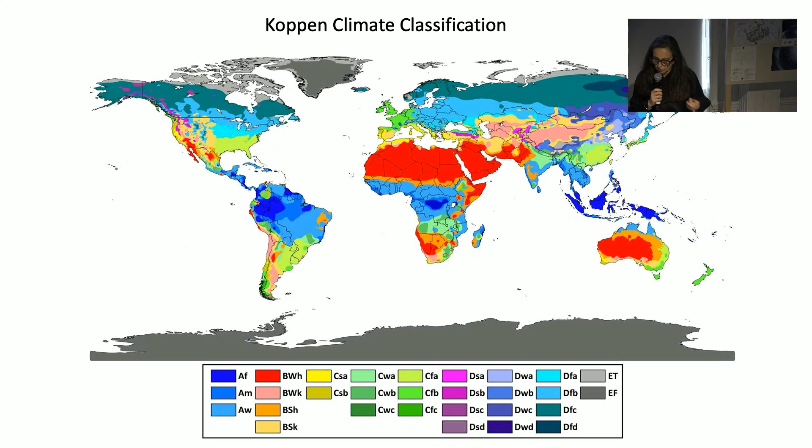How hot does it get? The solar angles change. How much rain do we get? It does vary even within the tropics. So this variety is very important to be contemplated in design if we are to stop making gestures and start doing effective design proposals. This is just to emphasize what the topic is about.

In this lecture, I will approach the design challenges of this region, which stays between the Tropic of Capricorn and the Tropic of Cancer. It does vary from a very warm and humid zone, where we see the darkest blue, to a variation of warm climate with some quite dry seasons as well.

So some facts. Why the tropics? It is home to some of the world's most undeveloped regions and those most affected by climate change. All these facts just add up to the fact that we should all be paying attention to the tropics if we want to make a difference in the world when it comes to climate change.

When it comes to climate, even before climate change, the tropics account for 40% of the world's total surface area and are home to approximately 80% of the world's biodiversity. In addition, we know that it is the concentration of poverty and vulnerable communities.

Vernacular architecture design in the tropics by tropical people offers beautiful, incredible lessons that we always look back on when we want to design something in response to these conditions. They know very wisely how to create not just comfortable - I would like to put this word in question - but healthy and pleasant conditions, and also create opportunities for social and cultural activities.

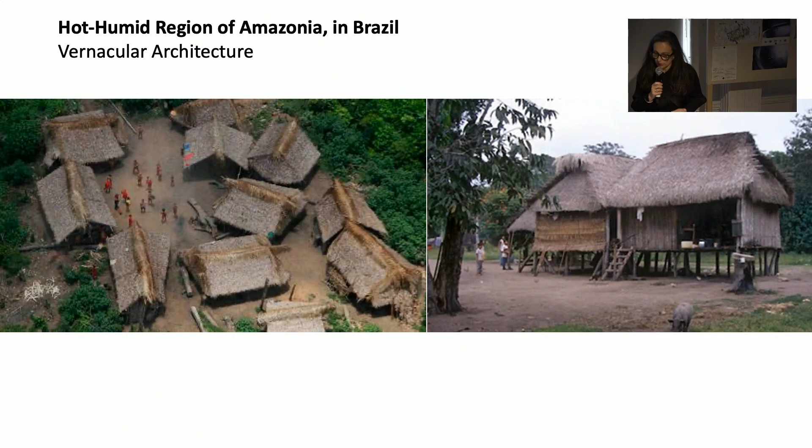So it's a reasonably new problem for architecture. That's before modernism did all these beautiful and, I would say to a big extent, responsive buildings that we will see. But how does it feel? What is Rio like when it comes to climate?

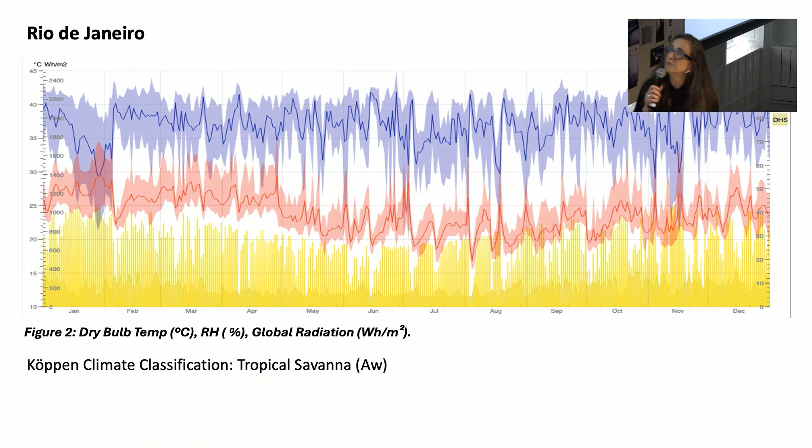It's something where humidity is almost constantly above 80%. Temperatures in the summer are easily above 27, between 27 and 35 degrees. The maximum can easily peak over 40.

Global radiation of more than 800 watts per square meter on the horizontal surface. That's quite a lot of energy. But it's a place that when we are in the shade and exposed to wind, you can really enjoy the tropical condition.

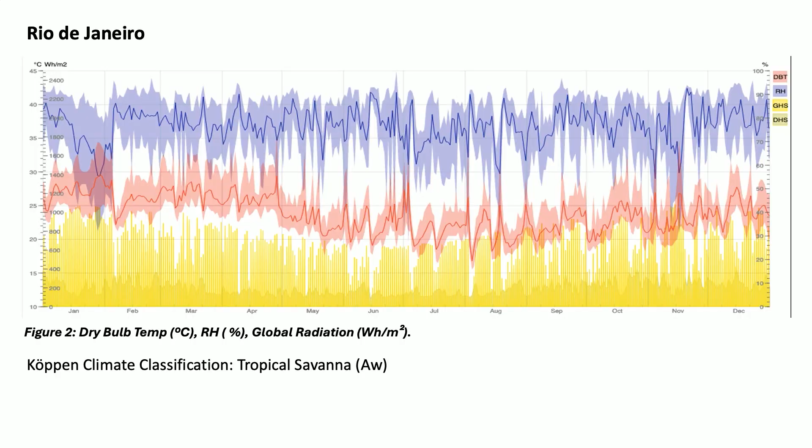And this is a problem, 1 million people living in a slum. So almost the glamour of the vernacular architecture, the glorious space of vernacular architecture, how do we apply the lessons when we have this context to deal with? This slum, by the way, was founded over 100 years ago, and it's a different issue than in Latin America, where the phenomena is more recent.

Now, just a bit of context. The United Nations put this challenge to us. By 2030, they want an agenda - they have an agenda for sustainable development. And it's very clear that we're not going to meet it if we don't look at the reality of the tropics today and what is going on there.

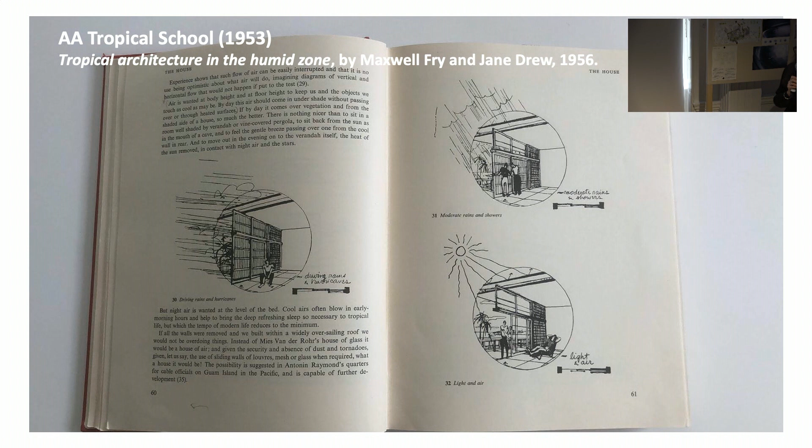But the discussion about environmental design in the tropics is not new, and the problem of the slums is reasonably new in some parts of the world. But we've been thinking about that, and this very school, the AA, was the center of the world in discussing environmental design for the tropics in the 1950s, in the tropical school.

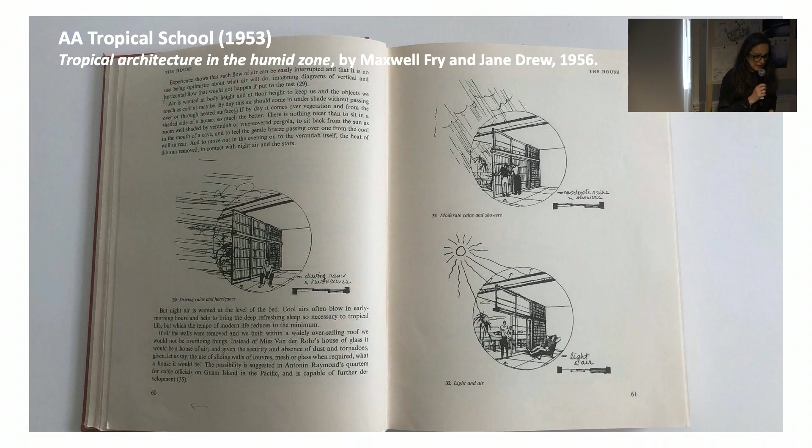Last year we had an exhibition here about the work of the Department of Tropical Studies that started in the 50s with two architects, British architects, Drew and Fry, Maxwell Fry and Jane Drew, who worked in India, worked in Africa, well, in Africa first, and then came to the AA to found the tropical school.

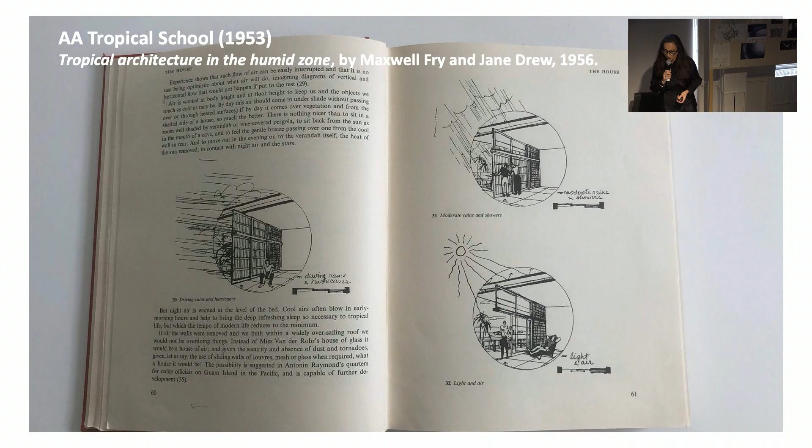And they had a very local approach to the topic. They look at how people use buildings, how communities got together, and they try hard to understand the climate. There was a lot of physics and technical knowledge applied, beautifully summarized in sketches and buildings in the end that contemplated the sun, the humidity, the air movement, a lot about transitional spaces.

There's one critique I have to that architecture, which is the sheer amount of concrete that the tropical modernism took to Africa and to India. But it was part of a whole moment that architecture and progress was going through.

In the lessons that we can take from their work, we see very lightweight envelopes, despite the concrete structure. Very well thought through and detailed apertures and systems for ventilation and shading, all integrated in the building systems.

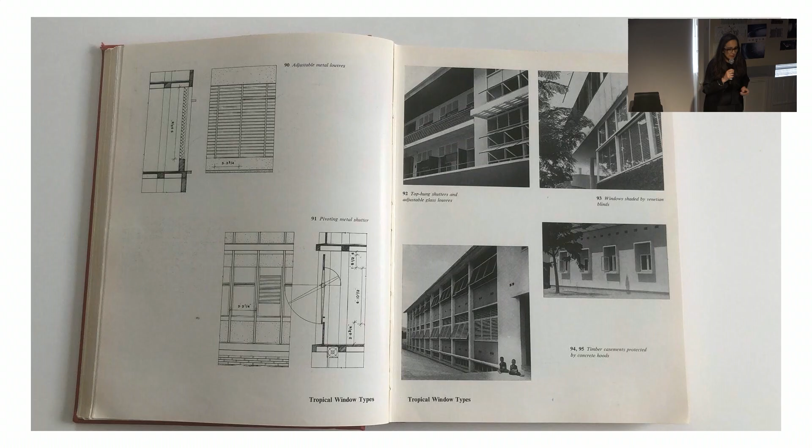These are some of the books that we have here in the library. I had a lot of fun, spent quite a lot of time going through them, and it's really beautiful. This knowledge was translated in a series of buildings - community buildings, residential, schools - including the Aburi Girls School, one of the first projects from Drew and Fry in Africa, in Ghana.

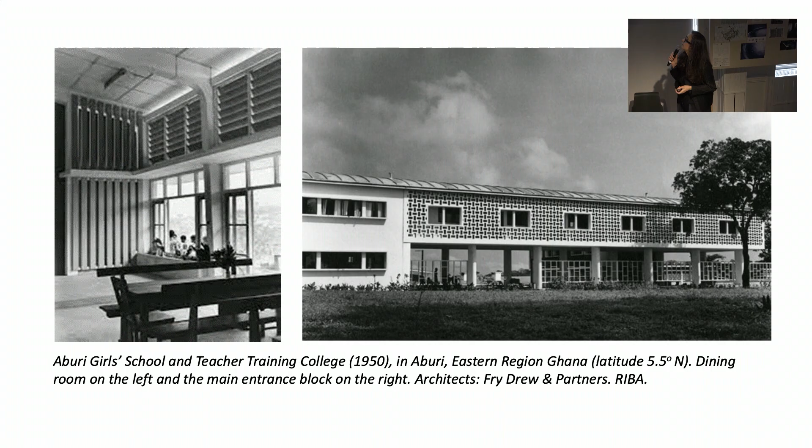Now, that synthesis that they did in architecture was backed up - and that's maybe my first strong point here, or message I would like to convey - very strongly backed up by physics, technical knowledge. Building physics is important, and we need to understand the phenomena. We don't always need to get to the details of the calculation, but we need to understand what is going on between the environmental forces, the building systems, the spatial compositions, the proportions, and the climate.

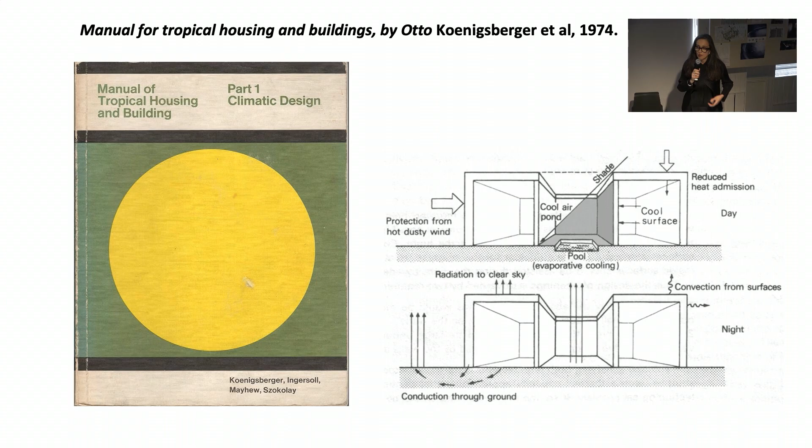And that was the work of Koenigsberger, the second director of the Tropical School, who stayed for two decades leading the school here in the AA, and formed a generation of architects from Europe, from Africa, from India, that came, studied, and went back to practice.

One of the seminal pieces by Koenigsberger was the roof in the warm, humid tropics, where him with a group of researchers studied more than 40 alternatives, looking at the possibility of materials, but also very detailed physics. And I love this - I photographed this page from the book where he says, if we want to standardize architecture in the tropics, the cities will come and they will grow, and there will be a population explosion, and we will need to produce a lot.

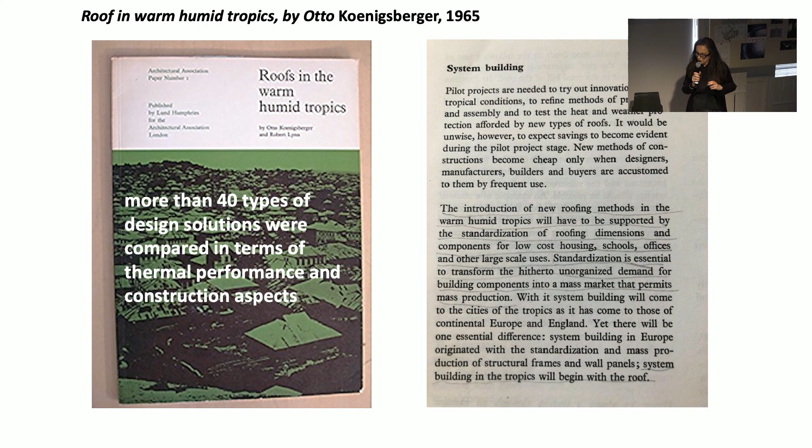Although in Europe we started our standardization process by looking at structures and wall components, when it comes to the tropics, it's the roof that's going to define this architecture. And of course, that comes from a well understanding of the climate. But not just the roof, which roof? We're going to talk about this in a few minutes.

Here is my second critique about the work of that generation. All this discussion about environmental design, back then and now, is based on a notion of comfort, of reasonable conditions we're supposed to create in buildings. Although there was a look to the culture and how people used buildings in those contexts to design for them, there was also a very westernized construct of what comfort is. And we're still doing that today.

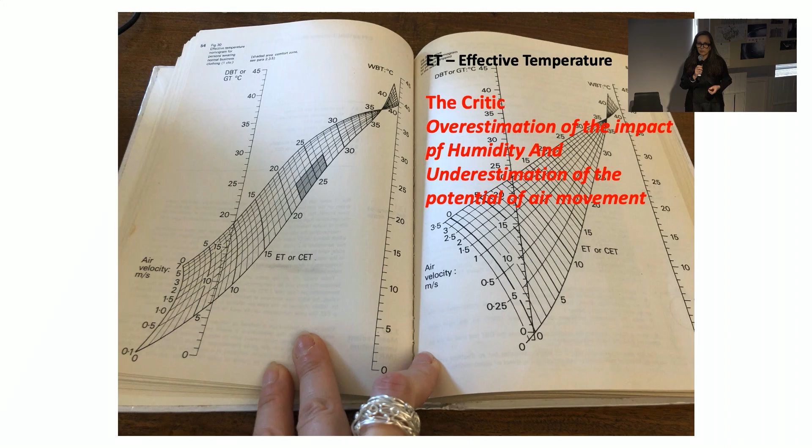This is one of the biggest barriers to advancing good environmental design in warm regions of the world. In this small gray area in the graph on the left, we see a combination of air temperatures and air movement defining what's supposed to be a comfort zone, far too narrow. 27 degrees is not too hot for people who grow up in the tropics, and 70% humidity is definitely not a problem. So there was an underestimation of the role of air movement in creating pleasant and healthy conditions, and an overestimation of the impact of humidity. I'll repeat, we still do this today, but less.

Decades later, we have what we call the adaptive comfort model. Those who study environmental design more are aware of that. It establishes a relationship between outside and inside temperatures. So depending on the average of the last week, a range will be acceptable inside buildings in a specific place.

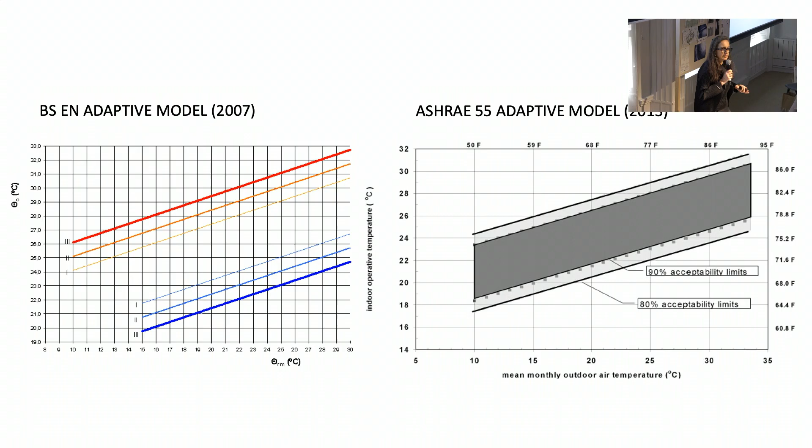Now if we take an average of the last month, this range will be slightly narrower. If I take an average of the last 3 months, it will be slightly narrower. The point is, we adapt. So the body has a memory of what's happening climate-wise — of the last week, the last month, and the last 3 months. So comfort, or health — when I say I'm uncomfortable in a certain condition, or assume other people will be, and therefore I need to design systems, we are normally not considering the potential that adaptability gives.

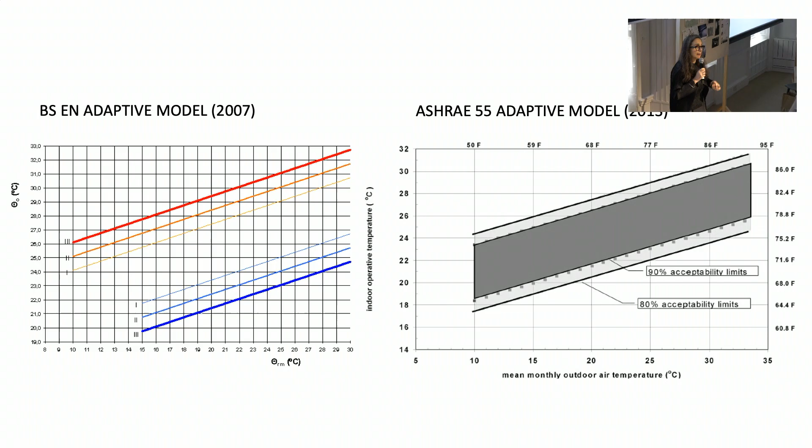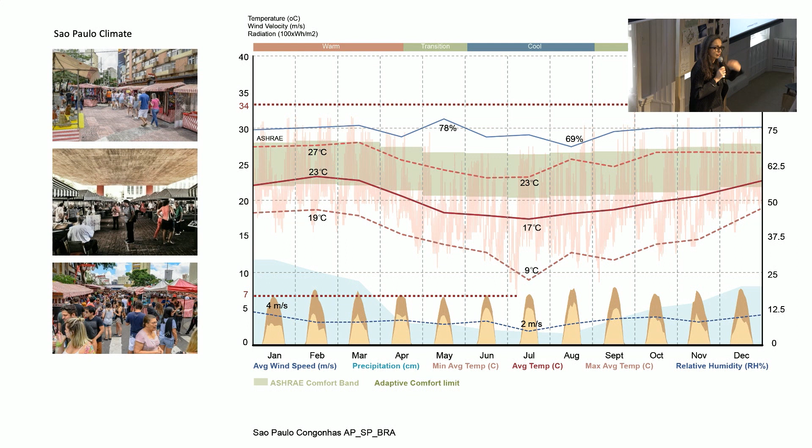If we don't consider that range, if we want to reduce the entropy in buildings, there's no way we can do it with architecture unless we condition spaces. But we definitely don't need to — not for health reasons, and not for comfort reasons.

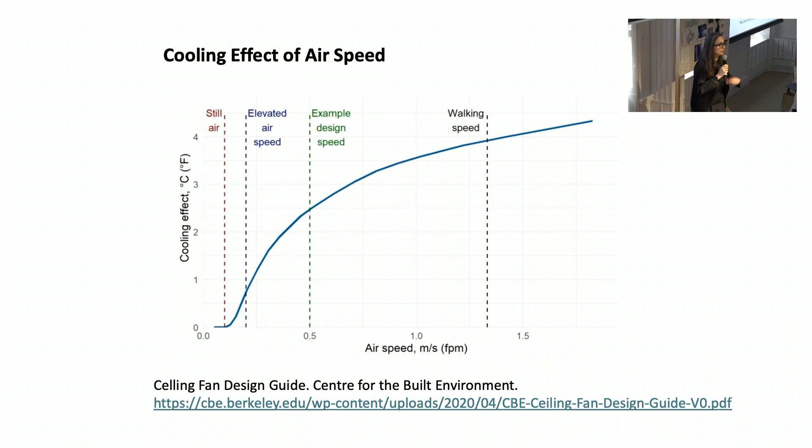If we consider now the effect of air movement, which has been studied a lot in the last 20 years, especially in warm, humid climates, we can have an increase or decrease in perception of almost 4 degrees — definitely 3 degrees with 1.5 meters per second, which is acceptable indoors. Papers will fly, but who works with papers? And if we have papers, we can find ways of fixing them. It doesn't need to be 1.5, it can be 1 or 0.8. The fact is we need to play with those variables.

Now, this is so important — I'm sorry I have this written. I thought a lot about how I could show these two concepts in images, but I didn't figure it out last night when I was preparing this. So I'm going to tell you instead.

There is a lot of discussion — one of the last points on comfort before we start talking about design — a very recent discussion that one of the reasons we are so vulnerable to viruses and other sources of disease, and why our immune system is so weak, is because we live in very narrow thermal conditions in conditioned buildings. It's killing our immunity. The more we are exposed to colder and warmer conditions, the healthier the body will be, more resilient to temperature variations, and the better our health will be.

In addition, which is fantastic, researchers on thermal comfort tell us that the best of thermal sensations — called alliesthesia, a change in sensorial perception of thermal conditions — happens in transitional spaces, with variations between air temperature, surface temperature, air movement, and even exposure to solar radiation. So these are the same people who told us decades ago that comfort was narrow, then improved it to the adaptive thermal model, and now are telling us that even the adaptive comfort model can be questioned, should be questioned.

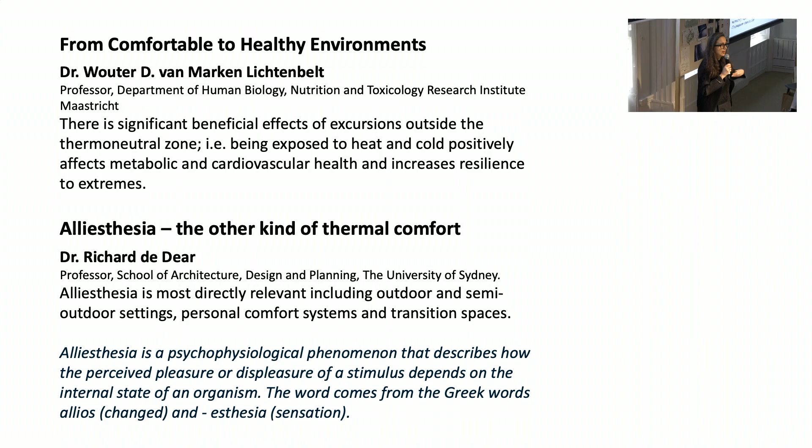When I was in the lecture and these guys were presenting these concepts, I raised my hand and asked, are you saying we can think of a building that doesn't have static or fixed conditions, but actually transitions? And they said exactly that. As we do that, instead of closing ourselves off as climate becomes more challenging, we're going to open up—open to the challenges of climate change, open to hot temperatures by creating transitions and exploring these sensorial experiences we can create.

The discussion about thermal delight and environmental diversity in architecture is not new. We have the work of great figures like Lisa Heschong in 1979, and Koen Steemers from Cambridge, talking about diversity and delight. This is where we unlock things once we understand this potential.

Now let's talk a bit about design processes. Learning from the existing built environment shows us examples of how that sensory experience, that alliesthesia, that healthy condition can be found. There's also the importance of building physics—the principles of environmental design—and the value of analytical studies that reduce uncertainties in the environmental conditions we're designing for.

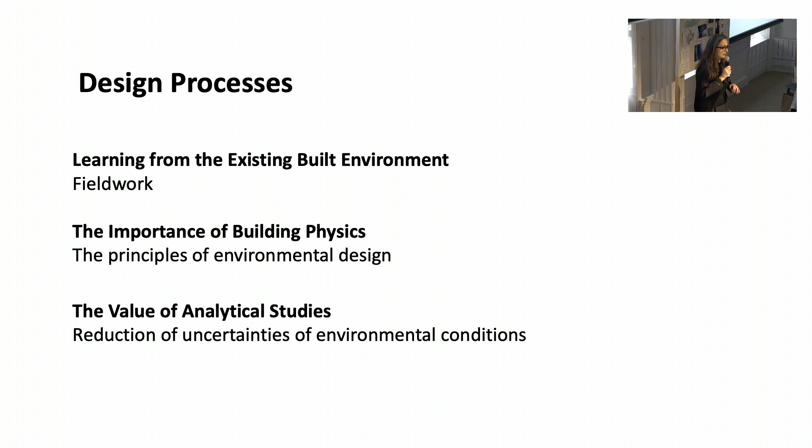So here are a couple of examples of design research I supervise in the graduate school here at the AA. One just finished, for a labor camp in the capital of Kerala, India.

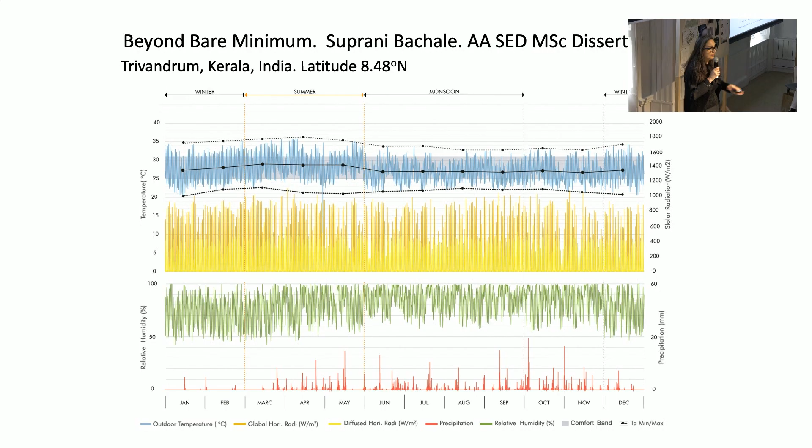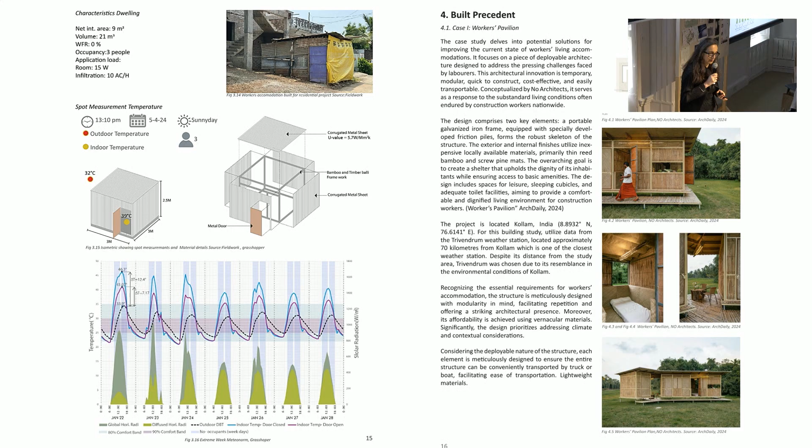We started by looking at the climate—environmental design starts by analyzing the climate very carefully. Then we looked at existing conditions, the materials available for this kind of building, and alternative solutions using better examples with natural materials.

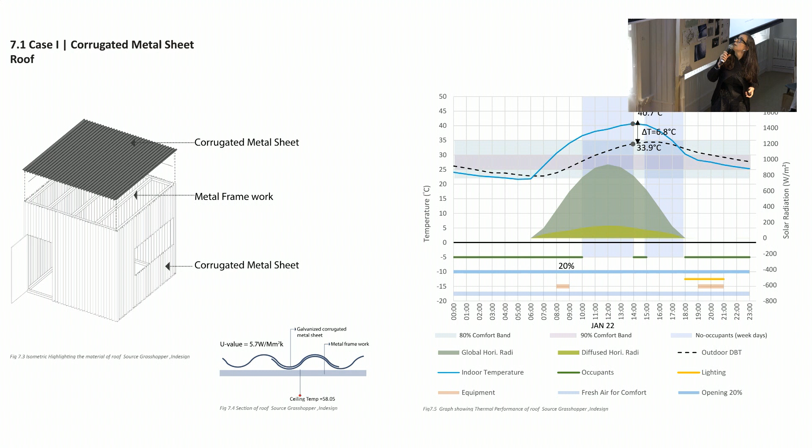Then we did what Königsberger told us to do: let's look at the roof. We're at a very low latitude, and a metal roof can give an internal temperature of 40 degrees—far over heat stress. If we're talking about health, anything above 35 degrees becomes heat stress, a serious health issue, whereas the outside temperature is only 33 or 34.

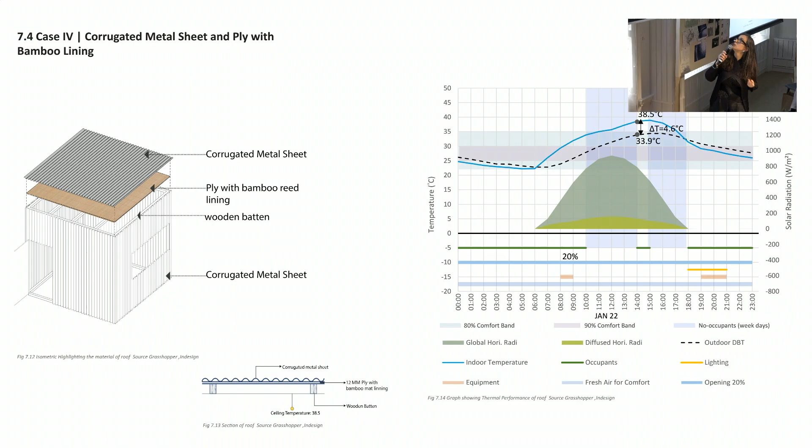As we increase thermal mass—not just shade—even in the tropics, when temperatures are above any health limit, say 34 or 35, mass becomes an important and useful strategy. We can bring the temperature down, and if we increase mass and insulation using the metal roof that's already there, we can bring it even lower.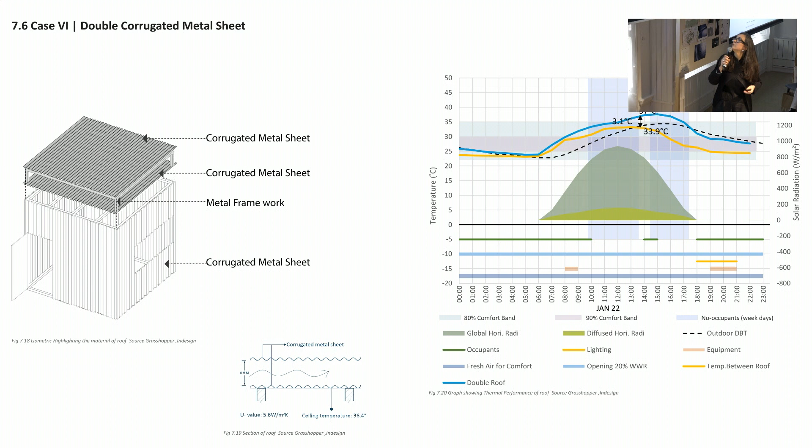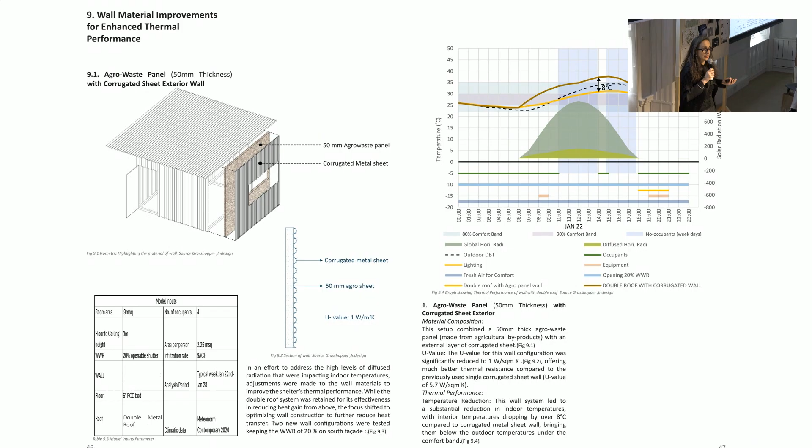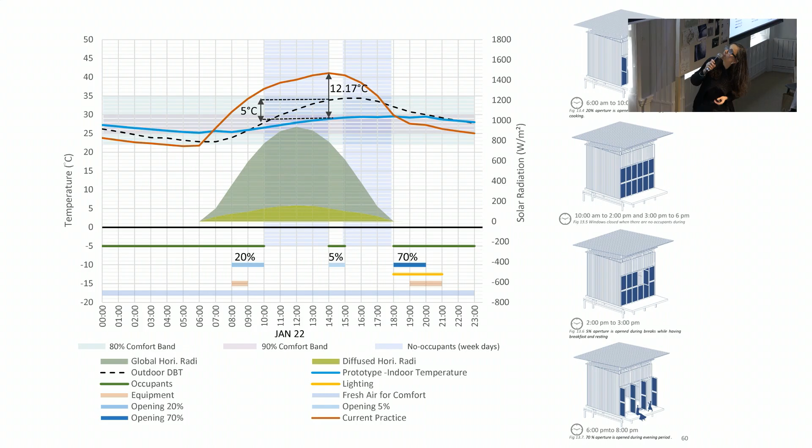Playing with reflections, shade, and mass, we can get well inside the comfort zone, also working with the walls so the envelope has more resistance to high temperatures, while the openings allow air movement when temperatures are mild. This series of analytical work led to a great result: temperatures below 30 degrees when outside it's almost 40.

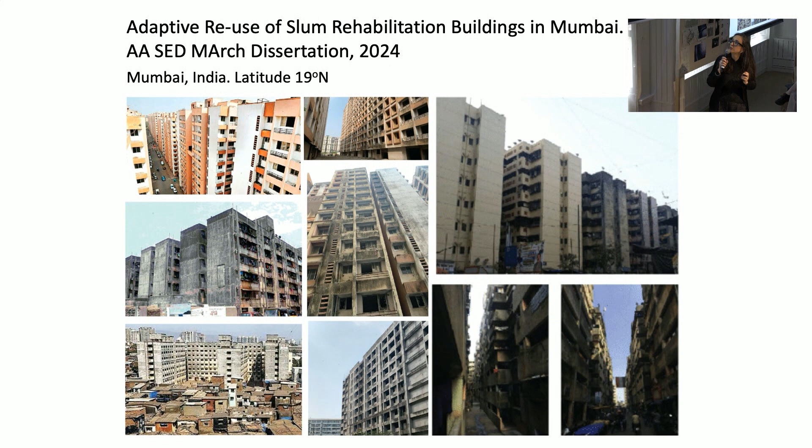Another exercise we did in the graduate school two years ago looked at density instead. The solution the Indian government gives in Mumbai for social housing is appalling, to say the least—the images speak for themselves.

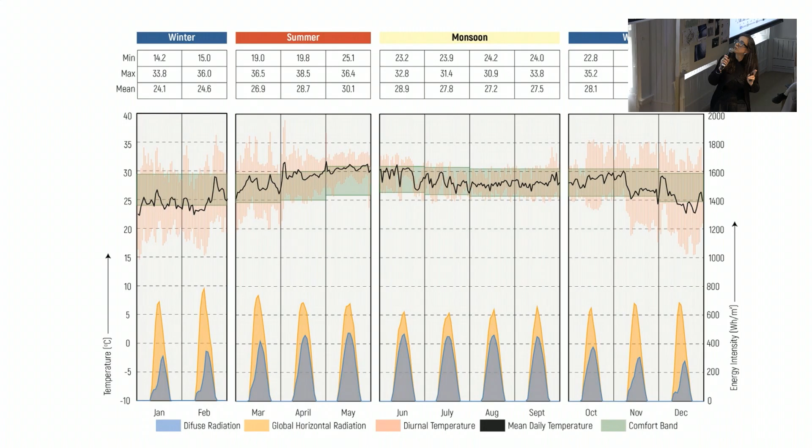When we look at the climate, it's actually not very challenging—easier than Kerala, easier than Rio. But we need to design well: we need to keep the sun out while bringing daylight in. We see average maximum temperatures just over 30 degrees, and in the worst case 34, where I can still keep the air moving and provide healthy conditions.

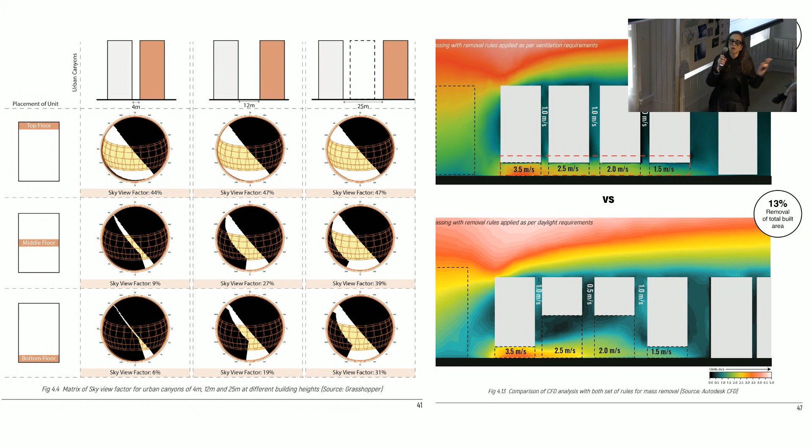So we took one of those social housing blocks that was designed but never finalized or occupied, and started cutting it—asking what's the minimum we need to open up that shape to bring daylight into the lower floors and air movement through the open spaces, creating pressure on the windows that leads to good internal natural ventilation.

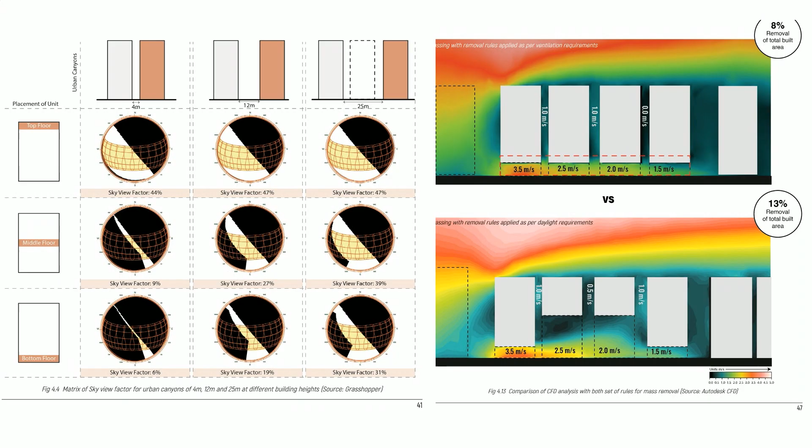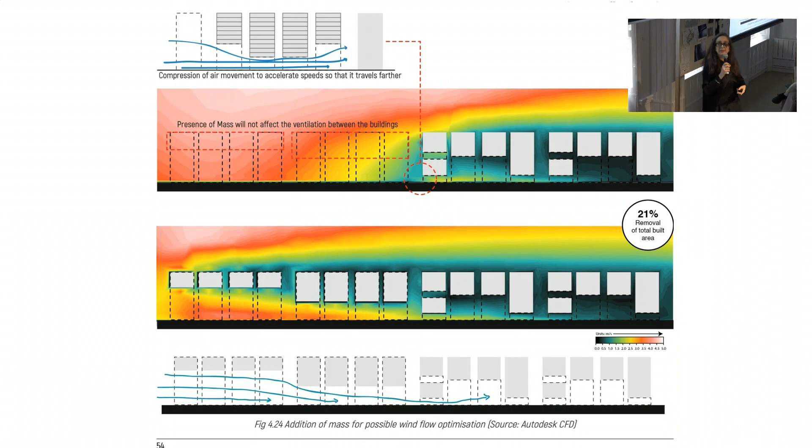We need analytical work, not just a feeling. We need complex analytical work. We can have simple analytical work helping us study the envelope, but we need complex analytical work to start looking at air moving between buildings.

After doing this minimum cut, because we want density, but there is a price. Some of this density will have to go for us to create living conditions in those spaces which already have a lot of carbon in their structure and envelope.

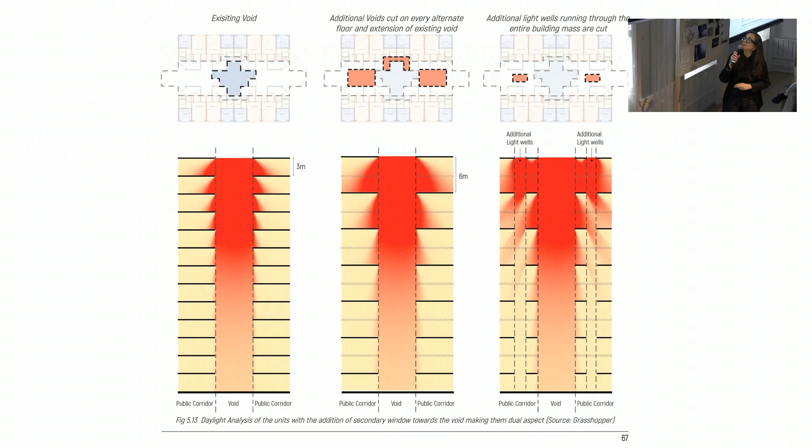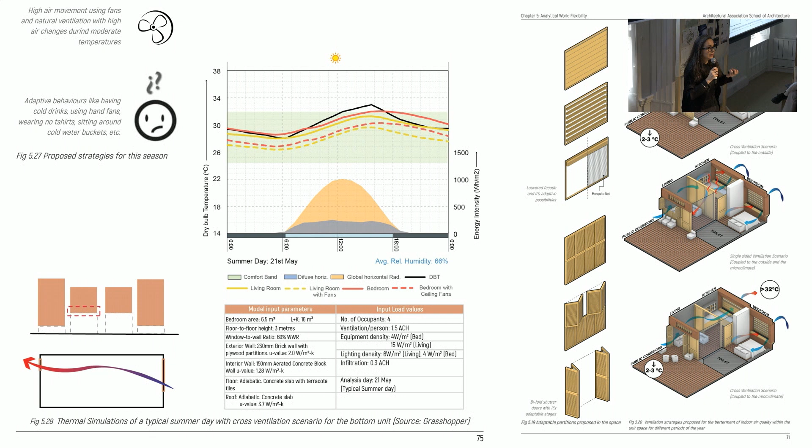Then we look inside the buildings. How can we improve daylight conditions? By creating this connection with the outside, we managed to get something below 30 degrees at peak when outside is almost 34. A series of transitions created shaded spaces where the mean air temperature would be far less than outside, just because, although it's an open space, it's shaded and has some mass.

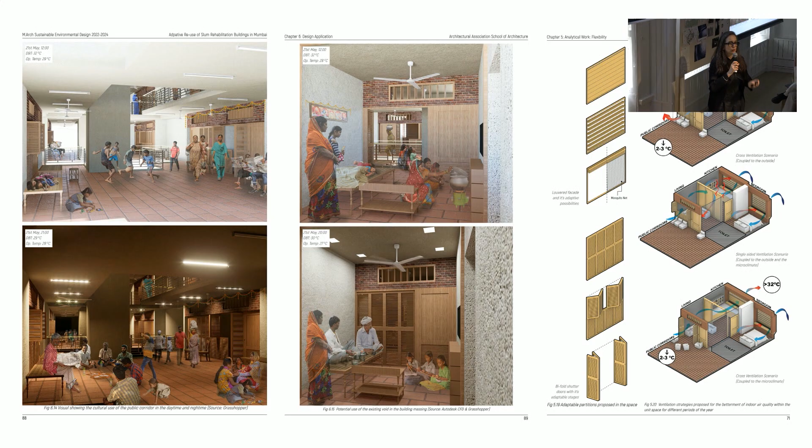That's the visualization, that's what we are imagining, like Weinstock asked us to imagine on Monday. So we work with the numbers, we work with the climate, we work with the principles. We build on the potential of adaptation, adaptability of the occupant, and we imagine better spaces.

Now let's go into the slum. A real-life project, something that started from a motivation that comes from these numbers. Brazil, sadly, is one of the countries in the world with the biggest socioeconomic inequality. As a result, or as a symptom of that, 30% of the population in São Paulo lives in slums, 22% of the population in Rio lives in slums, and the prediction is that we now have over 25% of the country's population living in slums.

Not different from what we saw in Mumbai, climate a bit more mild. We are in São Paulo now, Paraisópolis. It's wonderful, it means the paradise city, which is wonderful for these people. It's the hope to be inserted in the urban environment, to be near jobs, near healthcare and education one day. And that's why they come.

São Paulo, Rio, Recife, the big cities in Brazil receive a lot of the country's population looking to escape misery and be inserted somehow in a kind of urban infrastructure. So Paraisópolis has around 40,000 people living there nowadays, and is an example of a typical slum in Brazil or Latin America, consolidated, made out of brick, often with very vulnerable, very lightweight metal roofs.

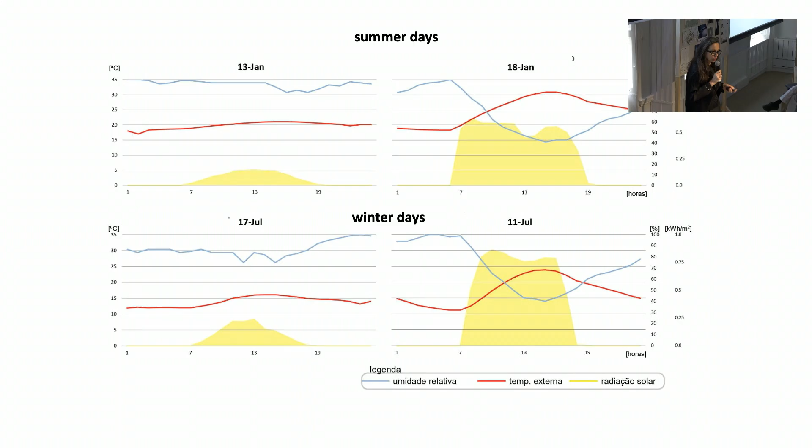When we look at the climate, it's not really challenging. Temperatures just go above 30 degrees on a hot summer day. Winter is very mild, it's perfect actually, 27 degrees if sunny. If it's an overcast day in summer, temperatures stay around 20-something. You just open your window - you just want the inside to be like the outside. That's a very important idea.

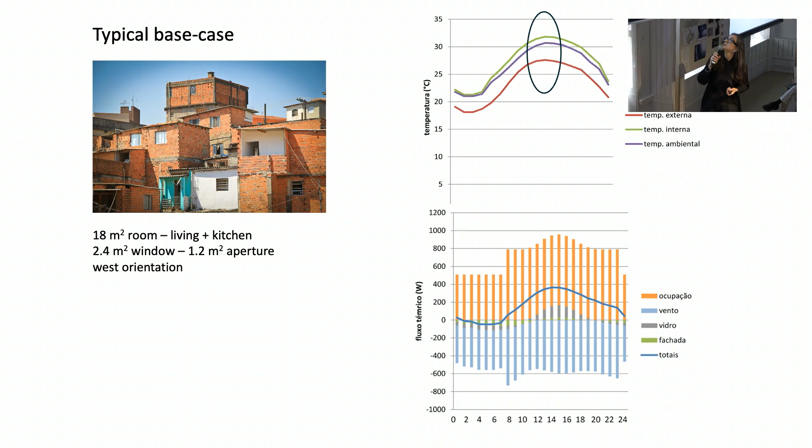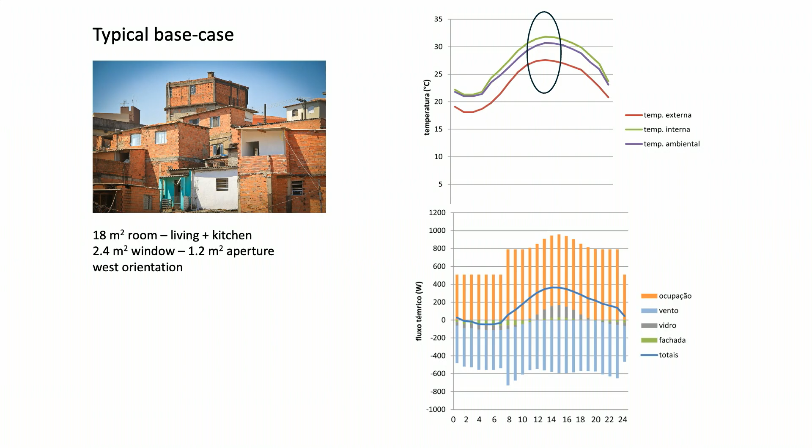So we did some very simple calculations to understand the impact of internal occupation, of internal gains, activities in the building. These people live in density and compactness. In fact, we saw if outside is 27, inside we can get over 30 degrees easily, 32, 33. What is the mistake here?

Ventilation is not working. The moment we increase the aperture to the point that we have half of the wall - now we are looking at a room which is not at the roof, otherwise the roof will be the main dominant factor here. But if we just want to study the effect of ventilation and windows in a community like that, and if we imagine the whole front wall can be permeable, like this image on the bottom right, we can have a reduction of almost 3 degrees Celsius. So ventilation works.

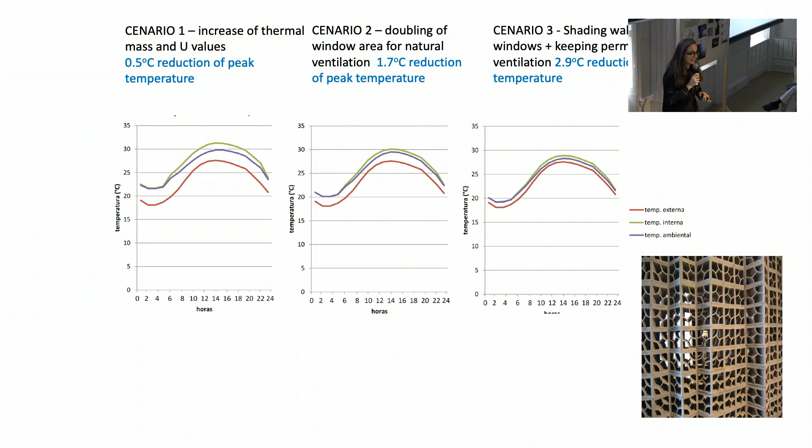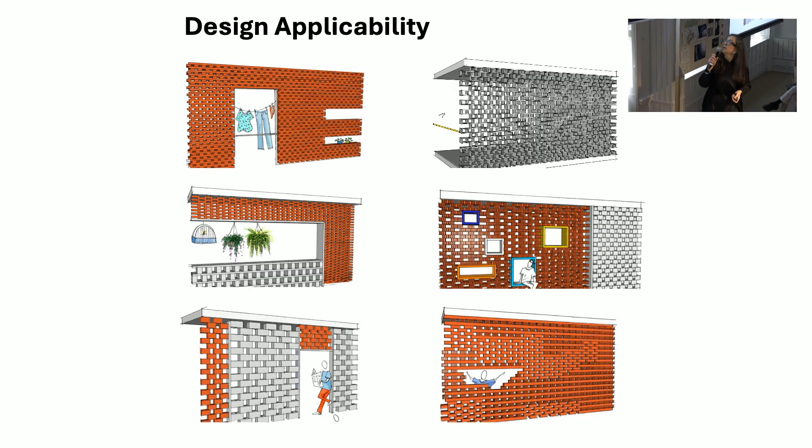How to design that? Working with elements that they have on site and that they use to build their homes. What if we start looking at the brick, which has the hand size? It's the easiest material to manipulate, to create different interfaces with the outside. From that point, we look at the facade, and we also look at the roof now.

Going back to the idea of transitional spaces, of ambiguous spaces - maybe it's not about being outdoor or indoor, but having enough shelter so the conditions are healthy and the space is a nice sensorial experience. When we look again at the slum and the level of density, the rooftop is absolutely prime space. That's where we have the sky, we are exposed to wind, we can control the radiation if we design for that, and we have open space.

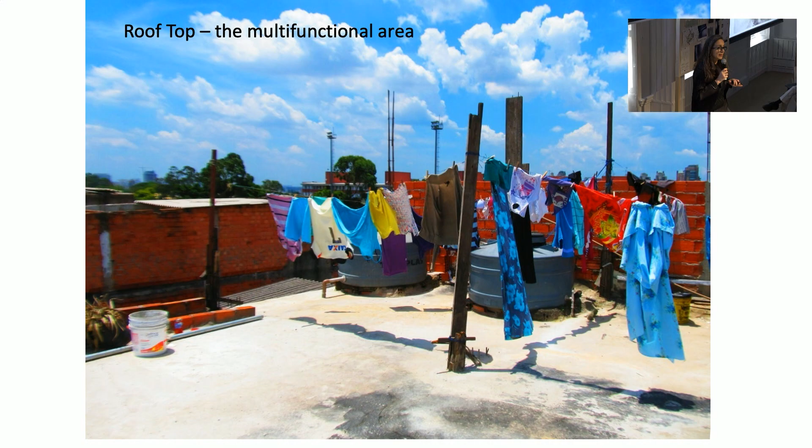And they do use the rooftop as an extension of the internal spaces, because there are moments when it's just impossible to be inside any room. So being outside is the place to be.

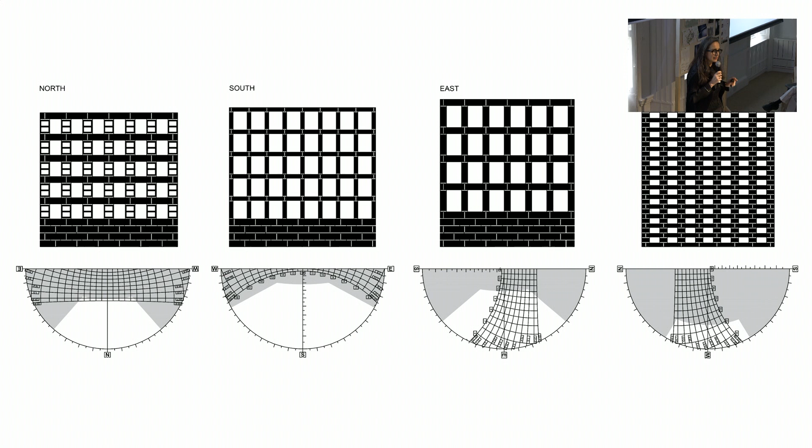So we go back to look at the climate. We know ventilation works, we know we want permeability, but we also know we want to leave the sun out, especially in the summer. So designing for different orientations, just building on that one element, the brick, and start building screens using its dimensions to create a proper protection.

And in that way, we consider environmental design as an open project, meaning we don't do it, they do it. And that's another strong point I would like to share. This is when we're going to start seriously having an impact.

So we create a simple matrix on how to use the brick to have the right shades depending on the orientation, if your facade is completely exposed, or if you are designing at rooftop.

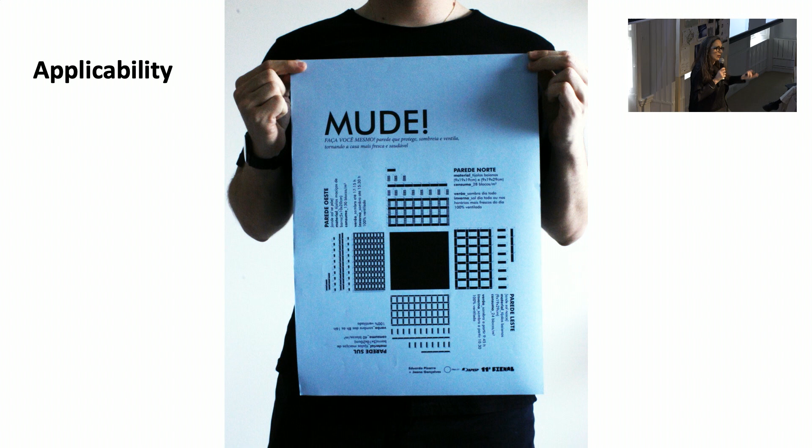Mude means change in Portuguese. And then you also demonstrate. We take a rooftop of a house and we see, we apply, we design, and we show how this could look like. And then we envision a transformation of the rooftops where every home would have this ambiguous space with the right shelter. So the outdoor space is the space to be now.

I'm going to come back to that project because this became a real project in a minute.

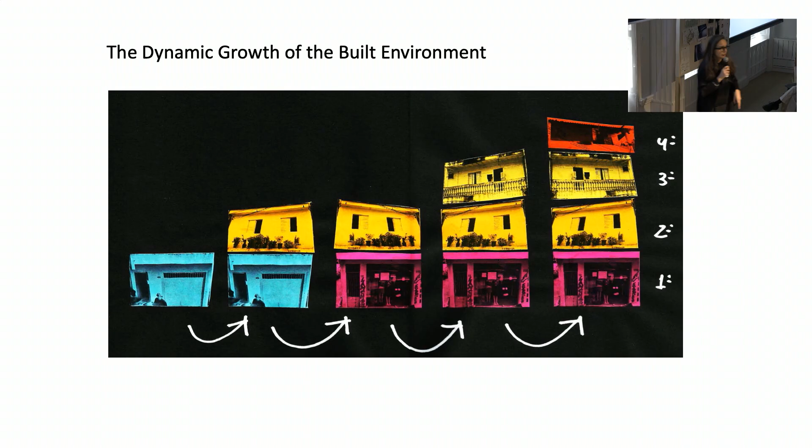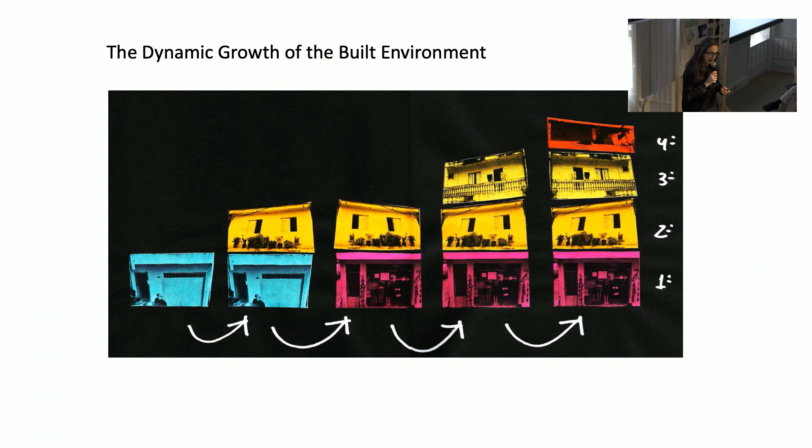We also went down to the ground to look at how the dynamics of that thriving built environment affect the urban environment, the spaces where people circulate, where they meet, where the markets happen, where the shops are.

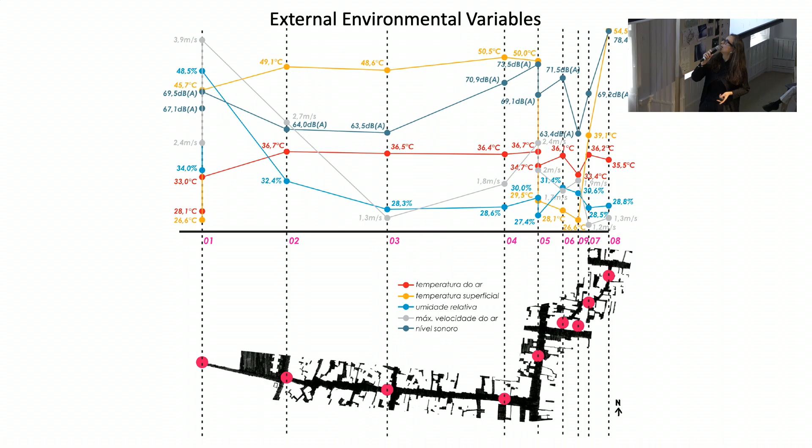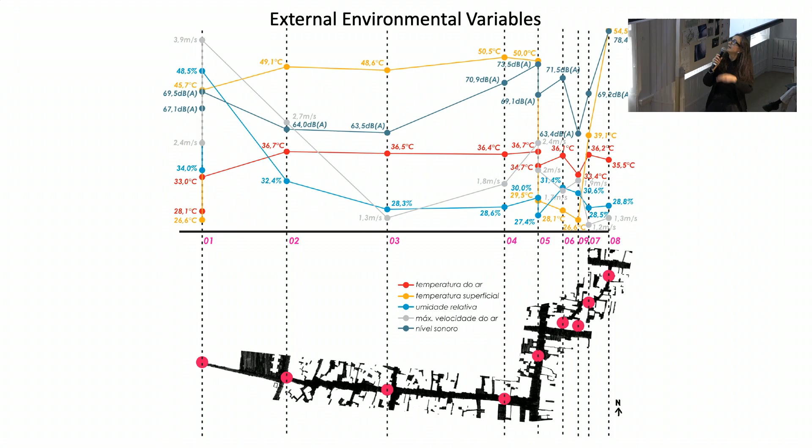As we go down to the alleys, as we go into that very intricate urban fabric, surface temperatures can go down to 26 degrees, 20 degrees difference. So much nicer to open a window to that than open a window to the main road. And air temperatures will also respond to that, and humidity and air movement.

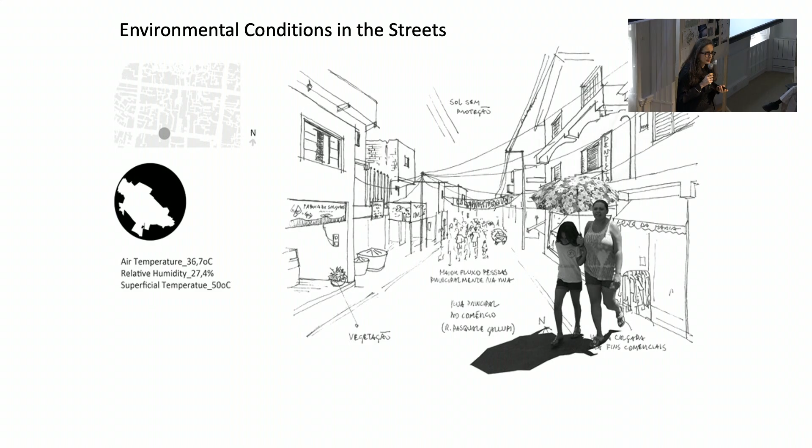We capture that in images to see how people adapt and how they cope in these situations, to learn something also from their experience. And we start seeing the difference.

São Paulo has just gone through a series of heat waves where the conditions in those homes and in the informal cities that tend to be warmer than the legalized, the planned city, it's much worse in the informal city.

And it hit the news. So a few weeks ago, Paraisópolis is 9 degrees warmer than Morumbi, which is the neighborhood, the former neighborhood of high-rises and green buildings on the side.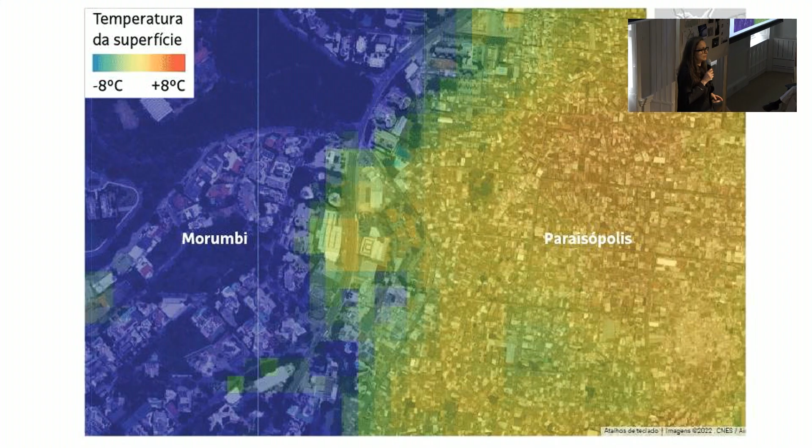It's actually much more than 9 degrees. At surface level, it's 20 degrees. At air temperature level, maybe 9 or 8. But what they were measuring here is just the rooftop temperatures. So it's worse than what they think.

And what we did with that project, the Everyday House, the university financed a construction of an installation which became a real extension of the rooftop of the association, community association building, where people get together to discuss their issues.

And then maybe learn about creating these screens based on design. Another important point for me, design is important. There's a lot in vernacular, there's a lot in local knowledge in these communities. You go there, it's a pot of creativity and invention, but we have a great contribution to do by designing, by giving precision, as a framework, as an open project, more than giving a final building.

Now, participatory processes and knowledge transfer, for me, is everything when we talk about this topic, again, if we want to have an impact. And the second experience we had

also with favelas, following the Everyday House, was a workshop supported by the UN Habitat Program in 2020, where we created a program, a TV program, a YouTube program, where we organized ourselves, a team of environmental designers, that basically what we did in this workshop was to analyze a series of photos that were sent during this hour to us online, observing these photographs, what works and what doesn't work, done by the people. This is self-built.

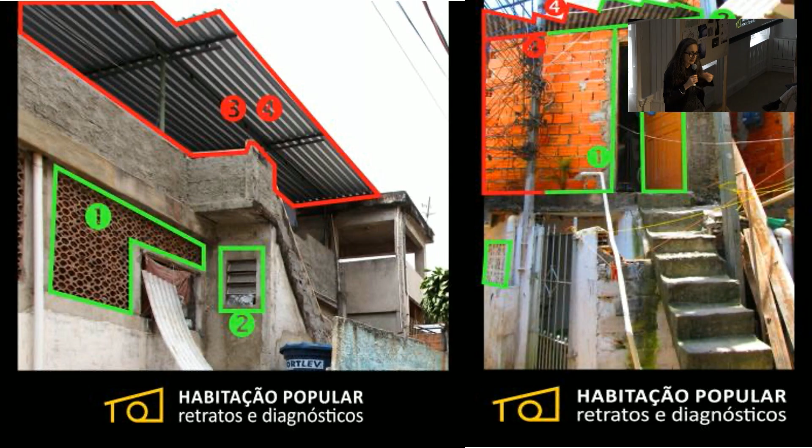So what is it that works there as an initial idea? Lots of screens, ceramic bricks being used as a way of keeping spaces permanently ventilated, rooftops shaded, but also lack of plaster, lack of protection of those walls that make them very exposed to solar radiation, both the roof and the walls. So we listed all of that.

We had less than 10 minutes to analyze those photos, and we posted 55 photos with suggestions also. If you have the money to improve your home, here's the photo, this is what works, go here and do that. That will be the most effective way of improving, of making your space healthier and more pleasant.

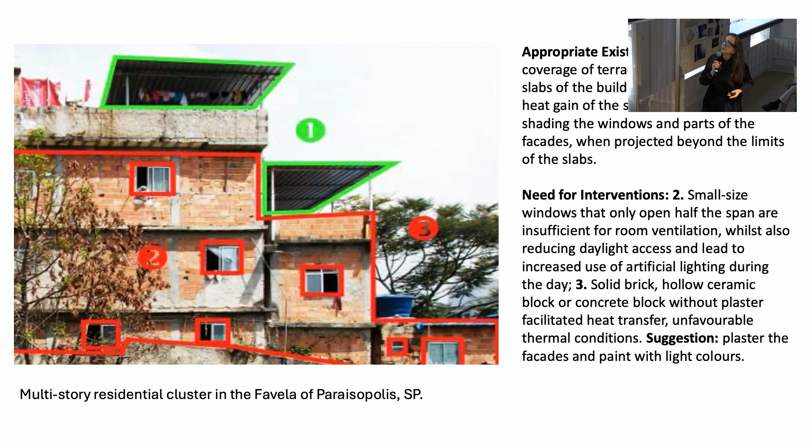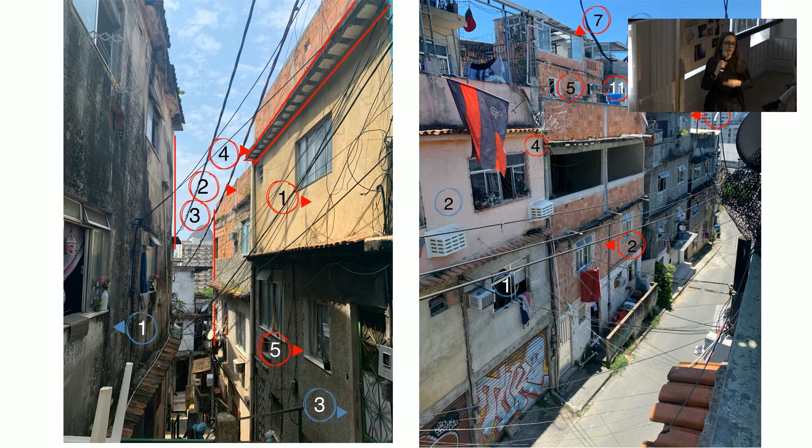But they do suffer when it comes to their conditions indoors. And we saw, again, the same problems, small windows, the brick without any kind of insulation or reflection to the sun, rooftops not always well shaded, and a compact form that it's really detrimental to ventilation.

We went inside to take measurements, and we found spaces with 38 degrees when outside was 28. And that's because of sun coming from the roof, coming from the wall, and windows closed. Now, as we open windows on rooms, in other rooms, we found a decrease to 34 degrees, still much higher than the outside. And this has to do with the activities indoors, with the compactness of the shape, and with the small windows.

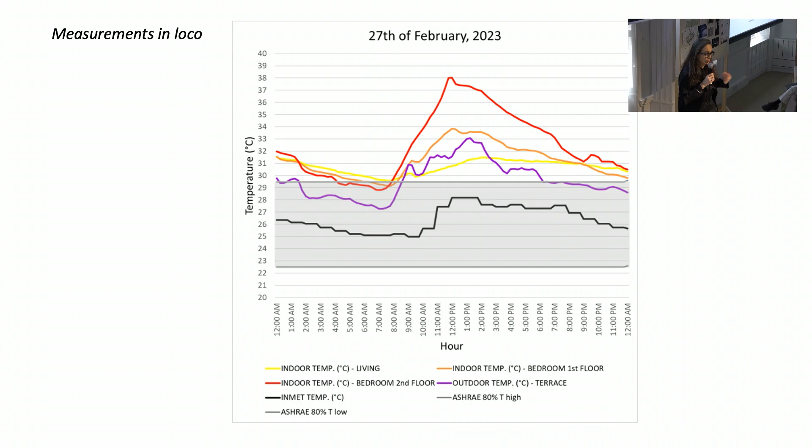Then we conducted a wide range of analytical work, and I'm not going to bother you with all of that. This is all published anyway for those who want to see this work, it's in papers now. We found a reduction from 42 to 32 degrees inside as we increase opening, and we protect the walls from the outside. External render, external plaster, a simple act that makes 3, 4, 5 degrees difference in those homes.

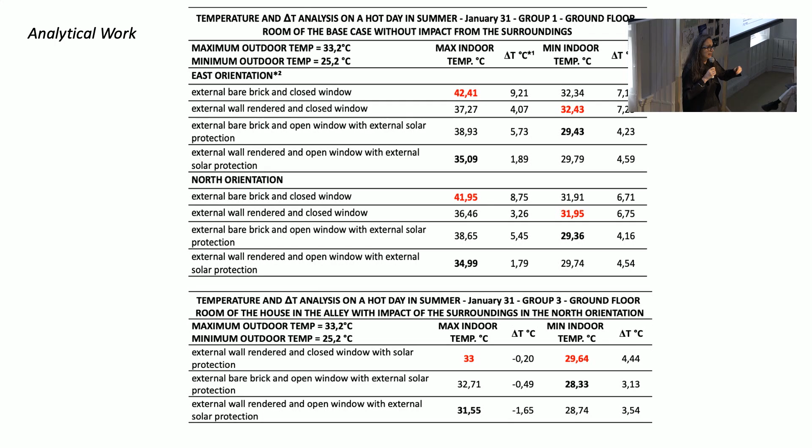The point is, I'll comment on this graph in a minute, when you have a bit of money and you want to improve your home, you're not going to go put the plaster outside. You want to put the plaster inside because you want your living room, your bedroom to look nice. And you're right, or they are right. So we need public policies to work together with these communities to then get to the level that we want in terms of responses.

And here we see just testing all those scenarios that you saw in the table before, now looking throughout the day, because we are not only interested in peak temperatures, we are very interested in night temperatures, when these people are going to bed, when they sleep. Maybe 32 is good during the day if the air is moving, but it's not good to sleep. It's not healthy. You can't sleep. So we need temperatures below 28, 27, 26.

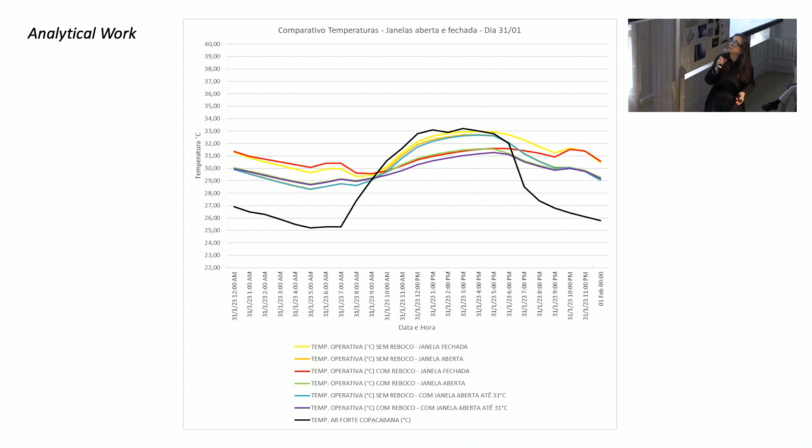What can we achieve? And we can almost get there. We can reduce thermal stress, but we need more air movement. And that's also where physics is helping us.

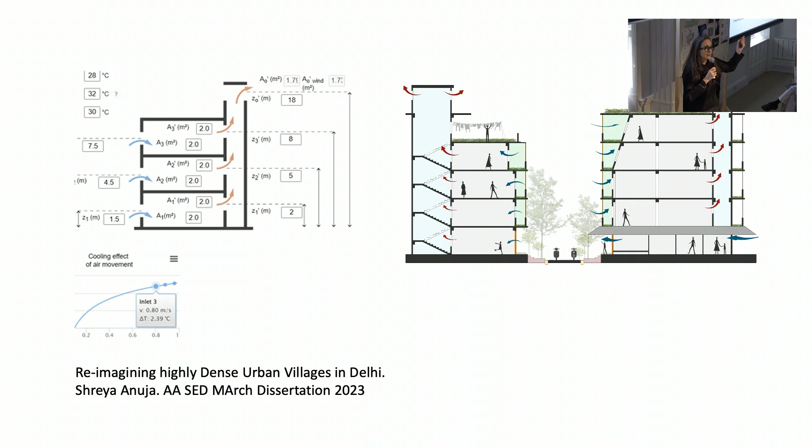And here is another unlock moment for innovation, that just by opening windows at that level of compactness, we were not going to achieve that. We need to introduce ventilation chimneys, an element that we are now designing, and see how can this become a market device that they can come and install on their steps, access to the rooftop, and then improve this ventilation.

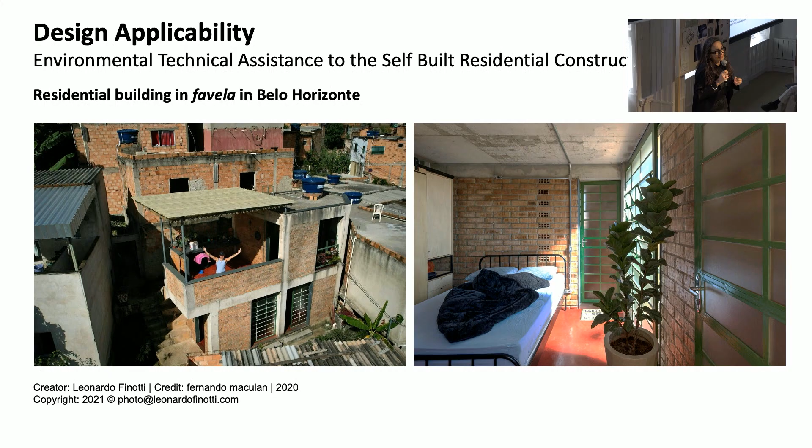There are initiatives that improve the conditions, as we see in other cities in Brazil, dealing with shading, dealing with bigger apertures. But if we look at what the analytical work was telling us, the external plaster is important, ventilation chimneys will be necessary. These are wonderful images, but in a future or in a situation of extreme heat, it's not yet good enough. So we need to come and transfer that knowledge.

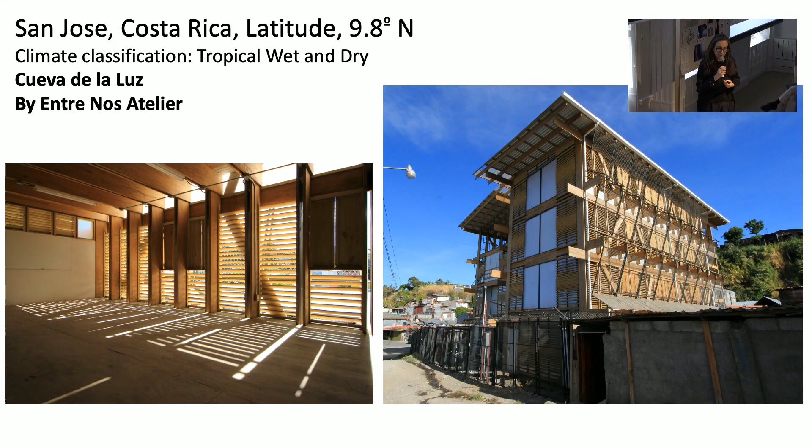We go to another part of the world, the Gasanze Pre-primary School by Asa Studio in Kigali, Rwanda, where we see mass, insulation, ventilation with design. Again here, the people are involved also in the construction process, not so much in the design. So we are learning about these projects by documenting them - we want to systematize all these processes.

Just a parenthesis, because I can't help not to be a teacher. Mass works in the tropics, and mass is going to help us in the future of climate change, because more than insulation that blocks the temperature or heat flow, mass creates that delta T that we want. So if temperature is 34, 35, 36, that could help in the tropics. Shade and ventilation are good, but we need more resistance, and we need the lag - we need that absorption of heat. This is what we see here.

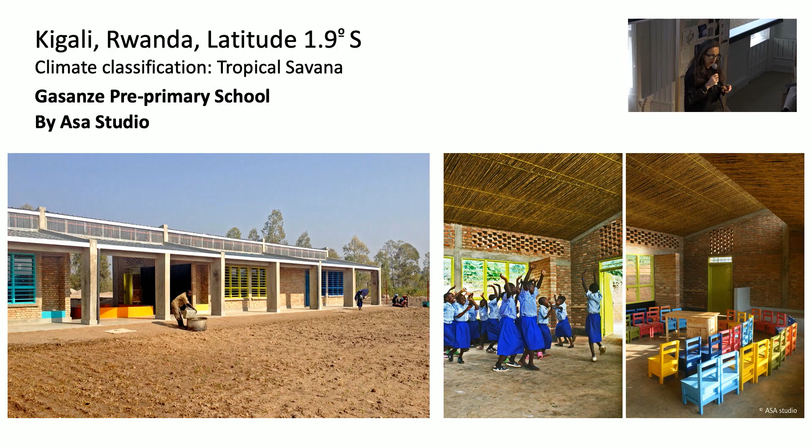A savanna climate, humid and dry - this general idea that the tropics is only about shade and ventilation is not enough in some places. This is why climate analysis is so important. We want to be technical about this, we want to understand the physics.

Now this is the last project I want to briefly mention. It's not a project yet, it's just a proposal that Weinstock was mentioning in the beginning. Just as Climate Week started, I got this wonderful news that the data-driven redesign for urban climate adaptation in Brazilian informal settlements has been approved by a UK funder that I cannot reveal the name of until we sign the contract. It's a 3-year project that's going to look at informal settlements right at the border with the University of São Paulo, with all the knowledge we've accumulated from the experience in Paraisópolis, the experience in Rio.

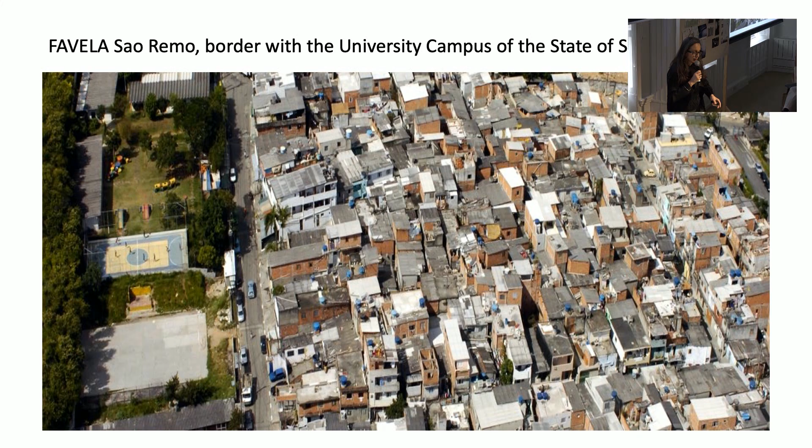The UN Habitat workshop, the environmentalized documentation of participatory processes - we're going to bring all of this together to try to answer these two questions: what knowledge to transfer and how to transfer it, to then have an impact in the life of these people.

So our academic aim is to increase the capacity of the favela residents to adapt their homes to cope with climate change. That's what we want to do, and we're going to do this in three ways. First we collect data, all sorts of real-life data, to understand the complexity and also the vulnerability of the self-built homes.

Where does the vulnerability lie? Is it in the external plaster? Is it in the ventilation? We need chimneys now, an element that is nonexistent in the tropical favela. What can we do with the rooftops to create great gathering spaces? But we need to understand the existing fabric, and then we design adaptation measures with them.

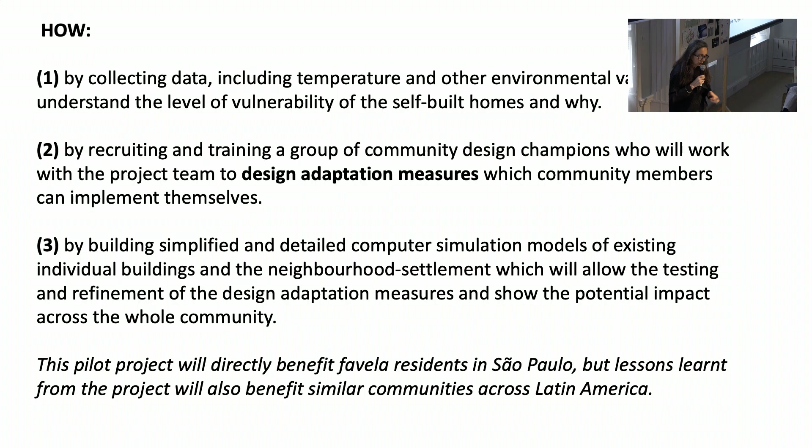What do they like? How do they understand their role? What elements do they recognize as their own elements of their built environment? Then we model, we analyze, we optimize, we make it adequate, and we offer this wide menu of solutions, hopefully. The pilot project is directly related to a slum in São Paulo, but hopefully we're going to have results we can apply to the rest of the country and the region, with variations of course.

It's an open project. Now I want to end by reading this paragraph to you, because I read this a few years ago and I think it's so encouraging: sustainable development also needs idealism.

It needs people who can show where it is we might be going, who can create experiments and pilot projects, sometimes on a small and sometimes on a large scale, which will overcome people's fear of the unknown and enable them to loosen their hold on the habits of a lifetime, of a generation, and indeed the habits of the Industrial Revolution as a whole.

That will give them the confidence to look forward to a millennium, which we can be certain will be a millennium of ecological scarcity and much poverty. Much of the planet is already populated, and towards the middle of the 21st century there will be 9 or 10 billion people, a big number, whom that planet is expected to sustain. It is only conceivable that we can do that if we utilize both our vision and our pragmatism. Thank you very much.

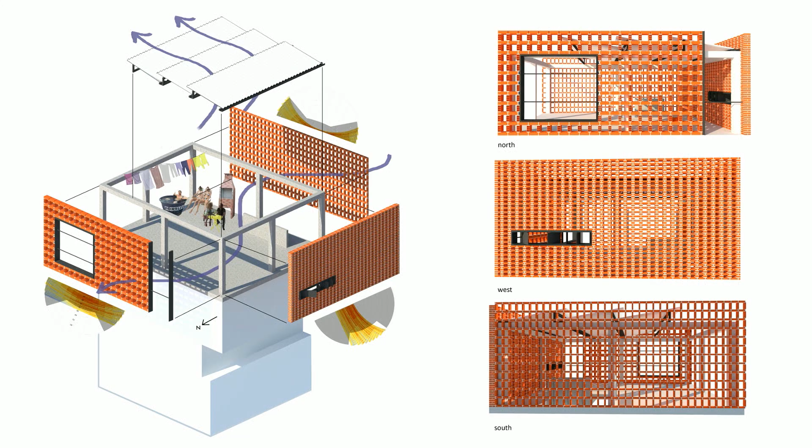What I'm learning, and what I think one should share in the school, is that we need to challenge not just how we design buildings in terms of building physics performance, but their functionality relative to different cultures. I want to share a statistical point which is super important, which we stumbled across but which sent a shockwave through a real-life project in Luanda, Angola, participating with a well-known architect on an extremely large urban development, almost 100,000 people living in it. It was very much the usual environmental approach, what the government wanted. Then we asked: who are the people going to live here? Well, it's the workers and investors, etc. And then the penny dropped.

75% of Angola's population is under 25. That's over 40% of the entire UK population being under 25, student age. If that is known in one country, many sub-Saharan countries have this very high level of young population. The health system gets them living longer, with no outlook. Who asks them what they want for their future? Even the government ministers at the meeting went quiet, because we're not designing for them.